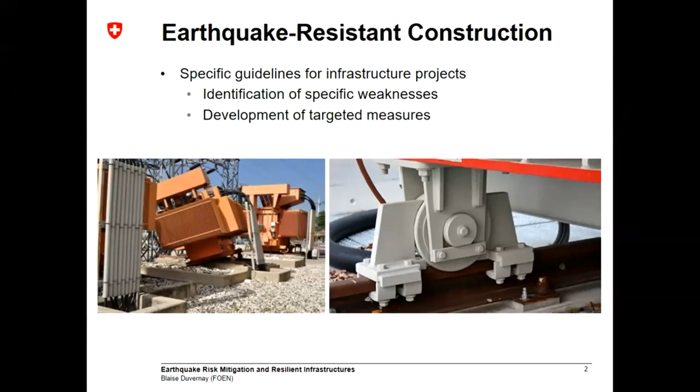One of the problems that we have identified also for infrastructure systems is the problematic of non-structural elements and equipment. Those are key elements to maintain the functionality of infrastructure systems, and usually they sustain a lot of damage during earthquakes. You can see here an image of equipment that toppled over.

There are relatively simple measures to secure these elements, but they are difficult to implement in practice because there's a lack of awareness from owners and architects, and also a lack of standardization of these products. For that, the needs that we have identified are to develop standard solutions and products that are readily available for planners, like architects. We need testing and accreditation facilities that are able to prove the performance of these systems, and we need information and simple instruments for owners and general planners so that they can implement those relatively simple solutions to reduce the vulnerability of these systems.

It looks like something relatively trivial, but the implementation is really far from trivial in practice, because this is not the responsibility of a civil engineer to take care of. This is mainly the responsibility of the general project manager, who usually has a very low level of knowledge for these technical problems. Hence these needs that we have identified for standardization, testing, and relatively simple implementation solutions for the owners and architects.

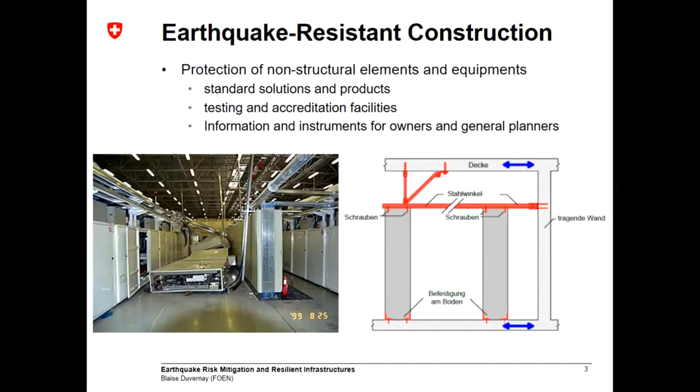We have also identified the potential for lower damage systems. Here you see two examples: a building with the traditional conventional foundation system, a building on base isolation, and on the other side, a bridge with a conventional design where we try to keep the foundation elastic and have damage in the superstructure. And there's another way to go about this, is to keep the superstructure safe and have damage and permanent displacement in the foundation.

The systems on the left are the traditional systems. The profession knows how to design these, how to implement these. The potential for lower damage systems such as base isolation or rocking isolation systems has potential, but doesn't find a lot of application in practice.

And therefore the need for testing facilities to validate this system. We also see the need for life cycle cost-benefit analysis to prove that this system actually costs less than the risk they reduce.

This is important for decision-making persons. And there is also a need for standardization of these new systems. They are not new in the research field, but they are new for practical implementation. I think there's a step that needs to be done from the principle to the standardization of these systems, and from my perspective, this is a big need that we have.

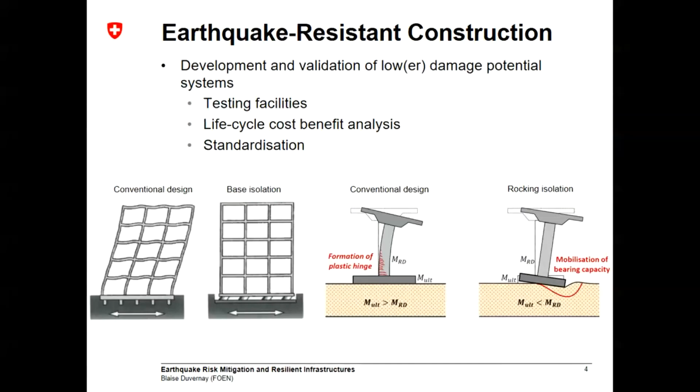And for that, we need to develop consistent performance-based design frameworks. It means that we have to develop simplified methods for the computation of the performance of these systems.

In research institutions, we analyze the problem with very fancy and advanced methods, and mostly those methods are not suitable for broad application in civil engineering firms. So we need to find ways to simplify methods so that they are applicable in practice, both on the side of the performance of the structure, as well as on the side of the definition of the acceptable limit states for these systems.

Traditional design, you have action on one side, resistance on the other, and you just need to prove that resistance is higher than the action. This is kind of a black and white, 0 or 1, approach.

But for considerations of critical infrastructures, you need more refined approaches where you have to define what is acceptable with what probability. And then you have to develop a code framework or a design framework system that is able to check these goals that are set for these infrastructures.

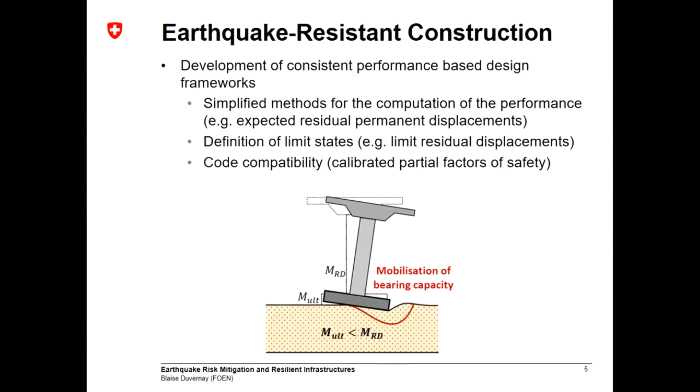And here again, we are far from methods that are applicable in practice, and hence this need to develop these frameworks in the research field.

We also need a pragmatic, risk-oriented procedure for the screening of portfolios of infrastructure elements. A lot is already built, some of it is pretty old, and a big challenge is to screen a large number of elements to pinpoint the high-risk ones for which you have to implement measures.

Here's an example of the Swiss national highway bridges. We have about 4,000 objects in our road network, and we had the task to identify what are the bad risks in this portfolio. Of course, you cannot make a detailed analysis of every one of these 4,000 bridges.

So we had to develop risk-oriented procedures to quickly focus on the bad ones. This allowed us to identify about 250 bridges from these 4,000 which are not acceptable in their actual state, and for which retrofit measures have to be implemented within the next decade or so, 20 years.

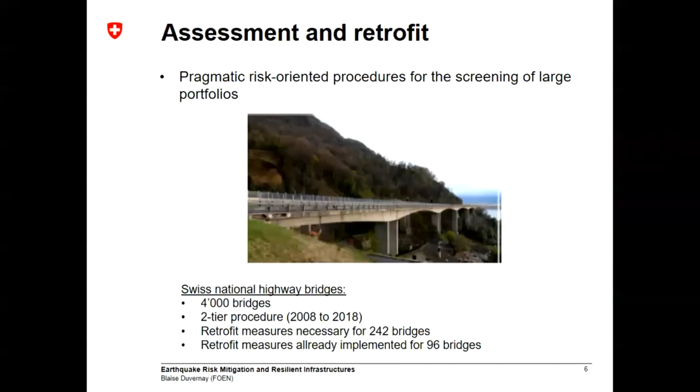So this is also a need that we have: to develop these methods to identify where the bad risks are hidden in our networks.

From a standardization perspective as well, we have a need to set minimum safety levels for individual elements in infrastructure networks. That means if you have systems already in place and you check them, for example, for their earthquake safety, you cannot expect that everything has to be 100% code compliant. You have to allow some flexibility for existing elements to be below code standards, because it would be simply too expensive to retrofit them to 100% of what is required for new elements.

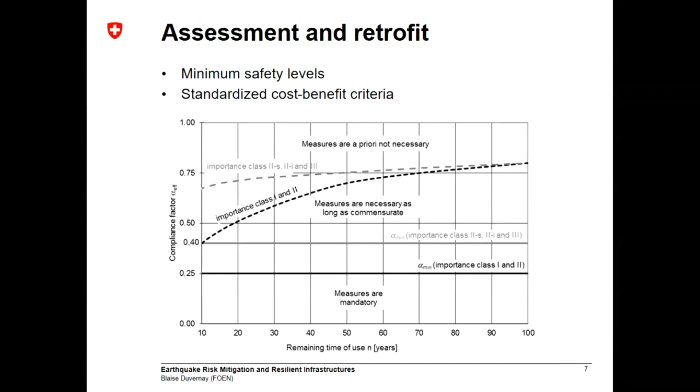And that means that you need risk-based criteria to define what is the minimum threshold that has to be reached by these existing elements. I don't want to go into details with this technical figure, but this is something that we have codified for the earthquake safety of existing structures in Switzerland.

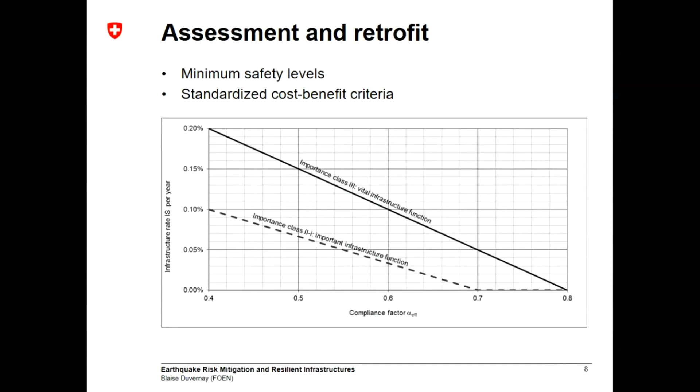We also need standardized cost-benefit criteria to roughly estimate what is sensible to invest in the retrofit of existing infrastructure elements. This is something we have developed for the earthquake safety of existing infrastructure systems in Switzerland. We cannot expect engineering firms to do a full-blown risk analysis to define the cost-benefit of retrofitting schemes - this is far too complicated. From a research standpoint, there's a need to develop procedures to assess the cost-benefit of measures so it can be standardized and implemented relatively simply by the profession.

One thing we try to achieve, but in my opinion is almost impossible to reach, is the development of models for spatially distributed and interdependent infrastructure systems, so you can assess the consequence of a particular scenario on interdependent systems. This should be the only way to truly know what happens if, for example, an earthquake occurs somewhere. It's a need, of course, but it's pretty far-fetched that we can reach this because of the high complexity and uncertainty in this field. But it's always on our radar - we're frequently asked, for example, can you tell us what is the impact of a magnitude 6 earthquake in Basel on the power distribution in Europe? It's pretty hard to say, but there's a need for these kinds of models, and research institutions are at the forefront of developing this.

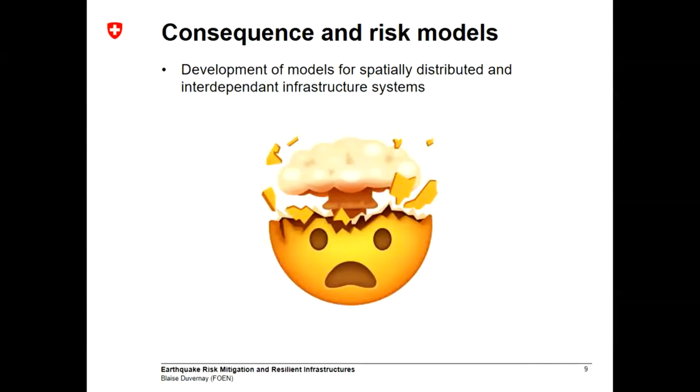A few more specific points, more targeted to geotechnics, that we have identified in Switzerland. We have quite a lot of problems defining design frameworks or verification frameworks for embankments related to soil liquefaction during earthquakes. It's pretty difficult to assess the potential consequences on the embankment system, what are the effectiveness of remediation techniques, and what we can develop as guidelines with specific performance objectives. I think the infrastructure of GeoLab surely has the potential to develop these solutions - to improve our models for the problem, but also to test the effectiveness of remediation techniques for these kinds of works.

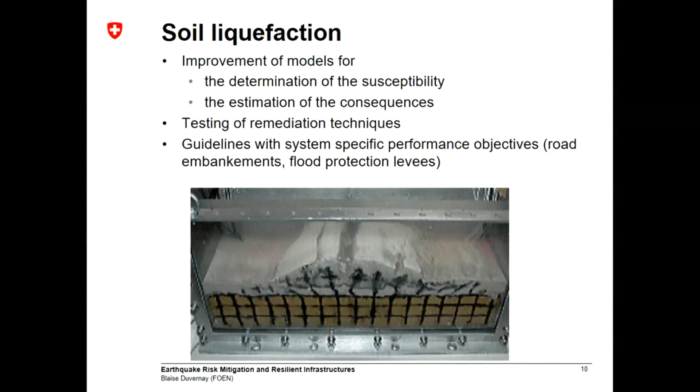In the field of preparedness, I think there's a lot of potential for early detection and reaction mechanisms. These systems are known but seldomly implemented, and there's surely potential for research in this field to better promote and show the potential and effectiveness of these systems - for example, automatic opening of doors for fire stations, automatic closing of valves for gas distribution systems so there's no uncontrolled fires taking place, and so on.

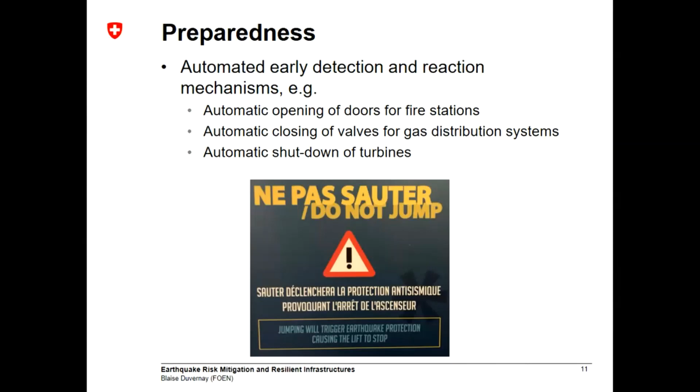Also on the side of preparedness, the field of structural health monitoring systems has a lot of potential for rapid assessment of damage after an event - earthquake is a paramount hazard that can affect all systems at one time, where you need to know relatively rapidly what happened and what is still functional and what not. Also for long-term monitoring of deterioration of infrastructure elements. This has a lot of potential and is probably pretty relevant to research that can be done also in the framework of GeoLab.

Okay, so that would be a short overview of my perspective. I hope this is targeted to the audience and your needs.